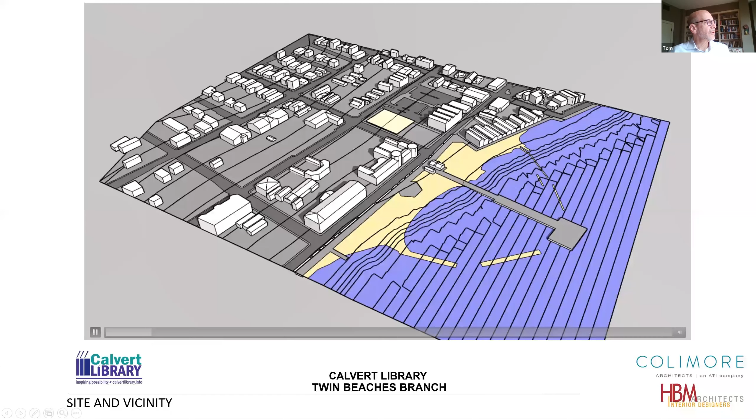Across, this is Bay Avenue here, this is Chesapeake Avenue here, 5th Street here. Our site and directly across the street, primarily residential, smaller residential buildings. We've got larger buildings to the east along Bay Avenue. This is a proposed building that's in design further along than we are, going to be a multi-use building.

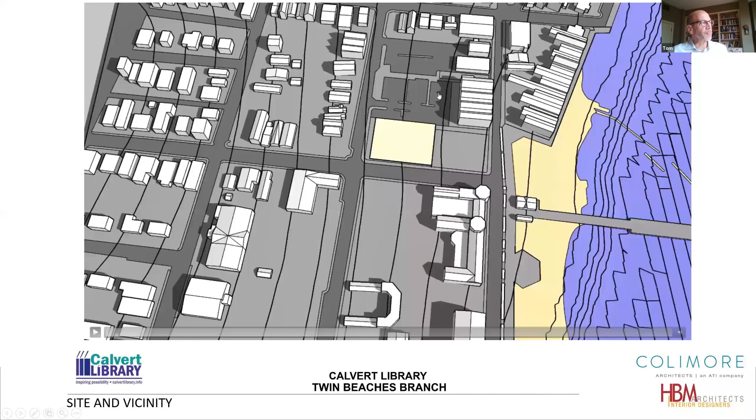You can see a lot of open space currently, parking lots around it. This is an open lot to the south of us as well. So it's a pretty prime location currently.

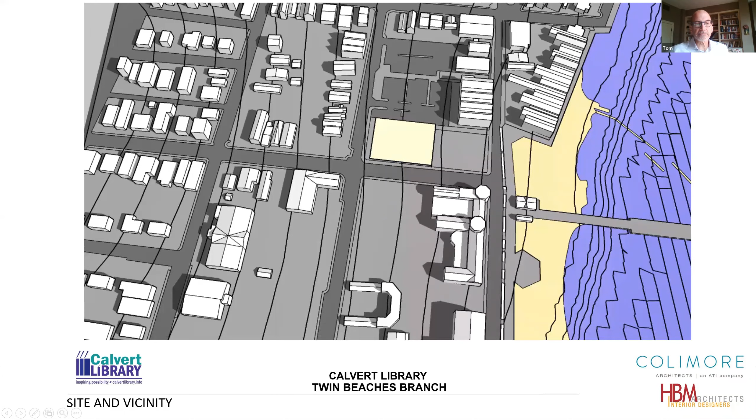This is our intersection and our site off in the distance here. You can see the significance of this major intersection of Chesapeake and 5th Street. Our goal is to design a building that will reinforce this intersection, hold this corner, and start to set up a building edge along this block.

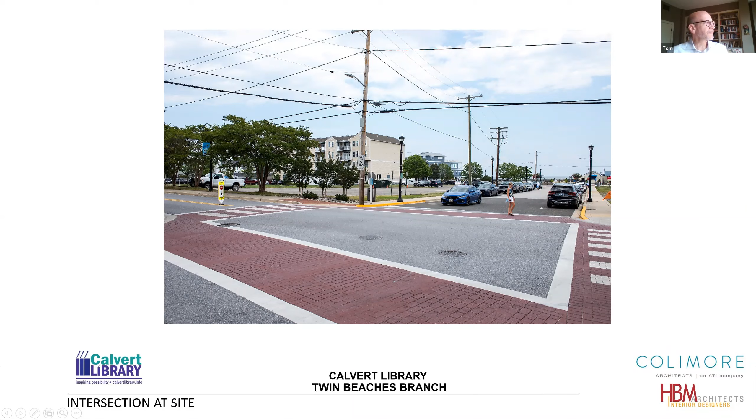Some of the surrounding buildings, taking a closer look at some of the buildings in the immediate vicinity. These are residential buildings, multi-family, so they're some of the larger buildings in the vicinity. Some of the common features you can see right away are the sloped roofs and the siding, the wood siding or wood-like siding material. Some of the newer buildings are elevated off of the floodplain.

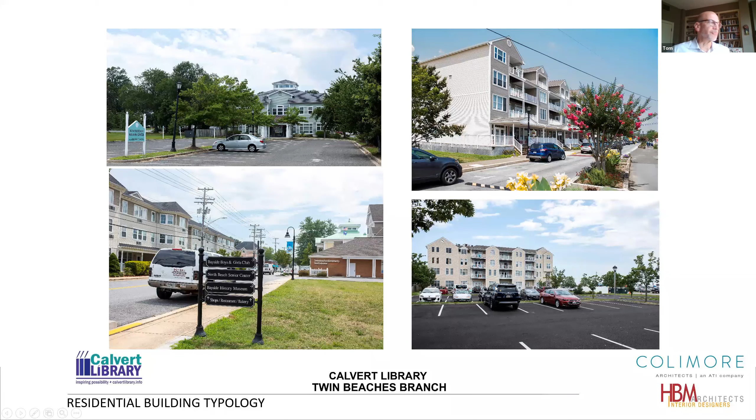Now these are our neighbors on the site. They are a different type of building, however. They're not a public building like we're addressing here. These are pretty private residences. The insides of these buildings are reflected on the exteriors that you're seeing here. So the inside are living spaces, and each room has its own little unique program and use, and that is typically a private function. Hence, you've got these buildings with a lot of solid wall with individual or small groups of individual windows. We call these punched openings because it looks like they're just taking a piece out of the solid wall to create those openings. This is something that lends itself well to this type of building, but like I said, it's a different type of building than we're dealing with.

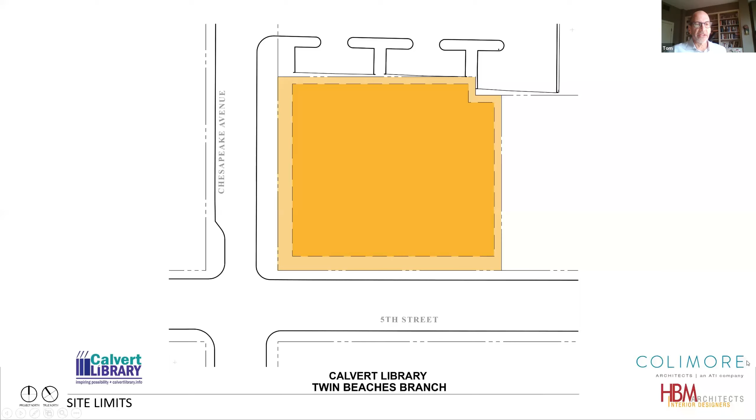So again, looking specifically at our site, here's our site at the corner of Chesapeake and 5th Street. Chesapeake is a major vehicle thoroughfare, as you know. 5th Street's pretty significant as well for vehicle traffic. A lot of people, when they come into town, I know when I came into town, I came in off of down 5th Street, this way to the beach. So our site is sitting here at this corner.

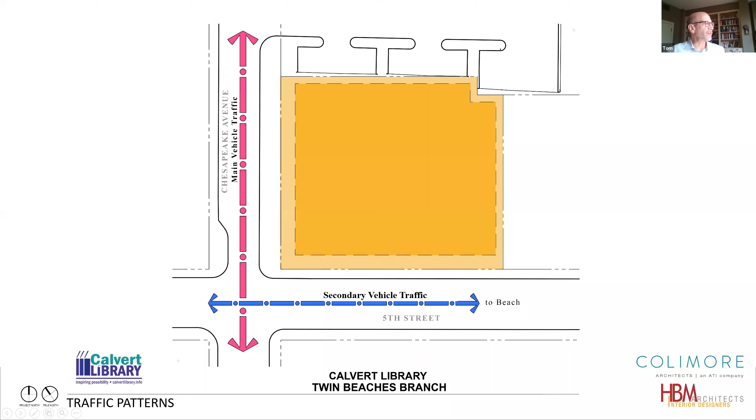So we feel we've got two very significant facades, two very significant faces of the building that we need to consider so that we can address these major thoroughfares. That's one of the things we're going to be trying to do with our design.

This red area here, I guess we're calling this the front of the building. So we're going to put the building entrance off of Chesapeake Avenue. This is still a very significant elevation as people come and go back and forth from the beach. This will be the entrance to our lower level of parking. I mentioned that some of the buildings are elevated for flood control reasons. Ours is elevated as well, but a little bit more so that we can actually utilize that space at ground level for parking.

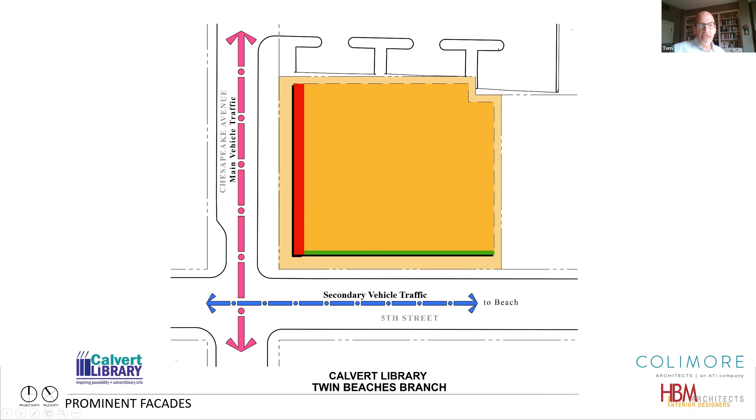And we showed you the corner. It's a very significant corner. We want to keep that in mind for our design and emphasize this area of the building, not just in architectural elements, but with activity. We want to try to activate this corner so that the action happening inside the building becomes visible on the exterior as pedestrians or vehicles pass by.

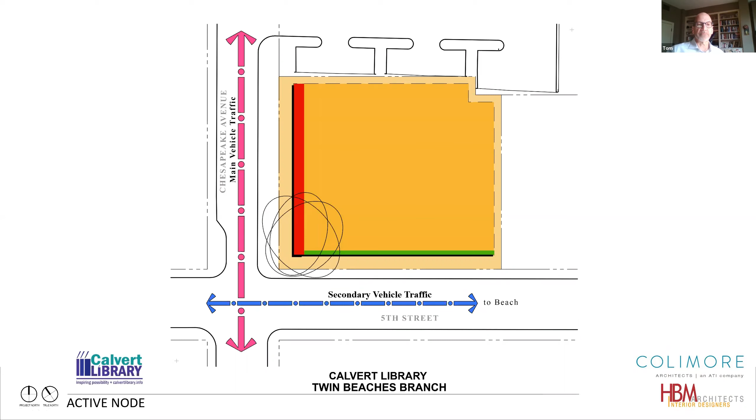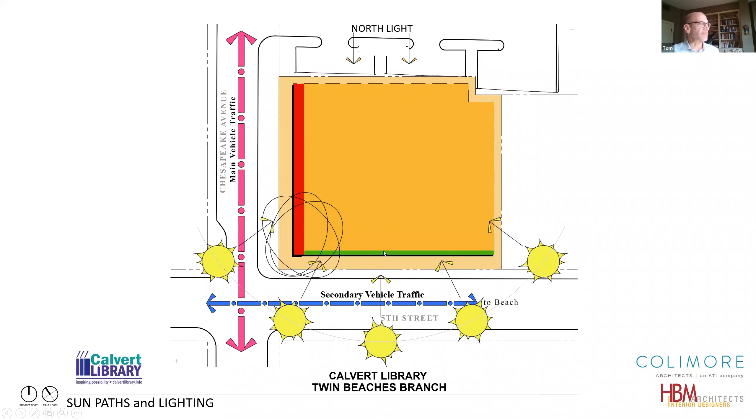We have north light coming in from this side. We want to consider how best to capture as much of that north light as possible. As you know, that's a very constant light throughout the day, very good for reading or really any other activity. It's a precious commodity, and we have a lot of it here on our site.

Finally, views. We have water views to the east and southeast. As you saw, we're one block away from the sands, so we're going to capitalize on this and try to take advantage of some good views in these directions.

I'm going to show you some images now that aren't necessarily your building or from our design. They're just images from other modern libraries throughout the country that we've drawn from for inspiration for the feel of certain spaces and their function.

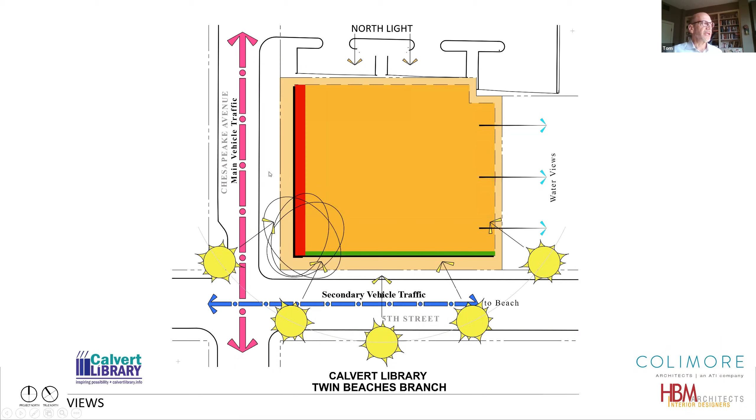So I mentioned that we want to activate these areas and express the interior functions as much as possible, displaying that on the exterior of the building. One way we're doing that is by having a small cafe, located at the entry level, the southwest corner, at the corner of 5th and Chesapeake. People sitting at the counter along the windows will have views out to the street and corner, and the activities inside will be visible through a large window in this area.

On the second floor, immediately above that, we have the children and teens area. The teens area wraps that southeast or southwest corner right above the cafe, so there'll be a lot of activity from that function visible from the street as well.

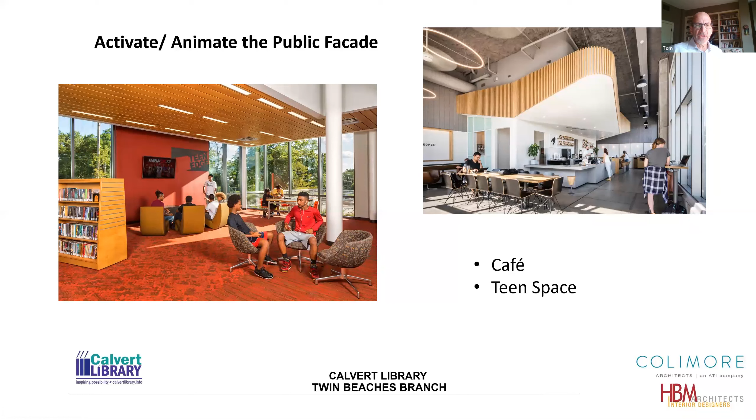I talked about the main entry being right off of Chesapeake Avenue. We are going to bring stairs that take people from the main entry level up to the second level, wrapping around an elevator, and pull that out in front of the building along Chesapeake Avenue in a sort of tower structure. We intend to open that up for visibility to the street as well, so driving up and down Chesapeake Avenue, you'll see people walking up and down these stairs.

You'll see the blank wall, which is the elevator, and that will give us an opportunity for possibly displaying artwork, temporary rotating collections, whatever, things you can experience as you're ascending and descending the stairs, and also things to give people a glimpse as they drive by on Chesapeake.

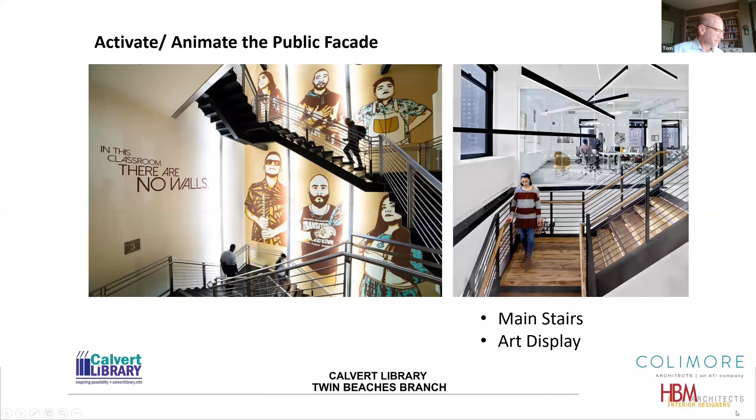We're going to maximize window space as much as we can. There was actually a comment during some of our early programming meetings with the public—people really liked the look of all the glass they were seeing in some of the examples presented during that session. So we want to take advantage of areas of glass as much as possible, not just so that from inside the building you get a view out into the outdoors, bringing those outdoors inside with you, but also for the views those will afford of the activities within the building, visible from outside.

So views inward and views outward, especially at night when the lights are on. We really want to activate that facade and give it a dynamic presence.

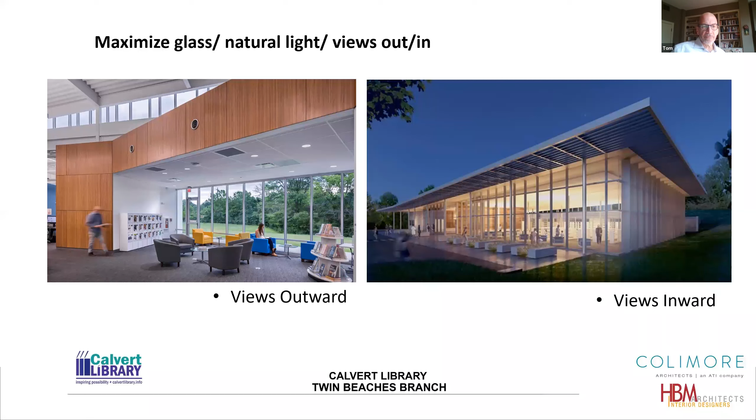We have opportunities for landscaping and use of outdoor space, not only along Chesapeake Avenue, the sidewalk that leads up to our entry stairs. We anticipate some planters worked into our stair system, which will double as benches and seating for people to hang out on those entry stairs.

Likewise, we're going to have some terraced decks off the east side in that area where I showed you we had those views to the water. These areas will be landscaped and hardscaped, possibly with large planters and seating areas. The walls of the building will open up in these areas and allow the interior space to flow out into the outdoor spaces.

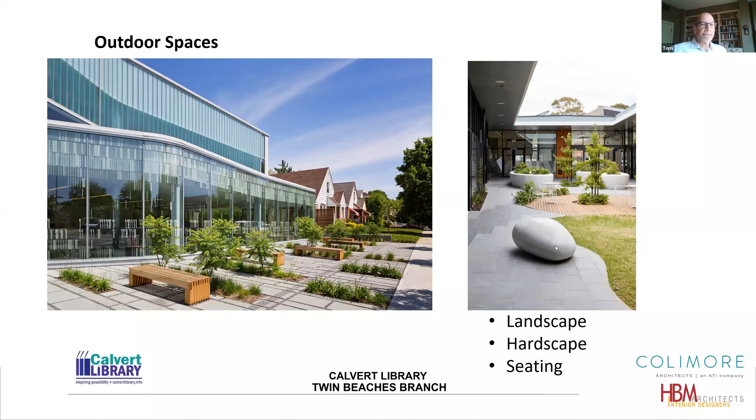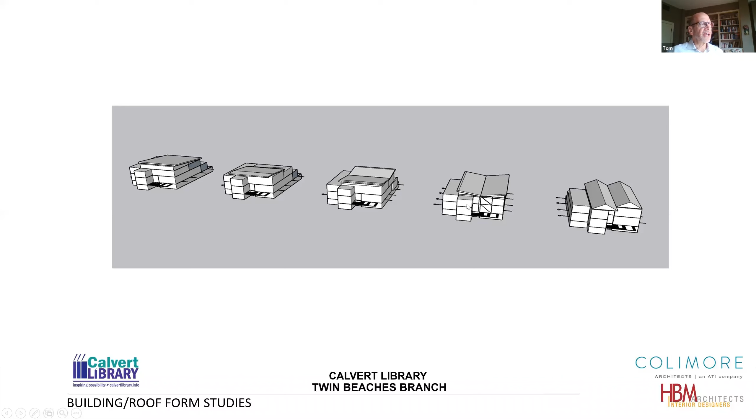We felt that this served our purpose better of defining the main volume of the library building. So this is the one that we ended up developing, that we ended up pursuing. This butterfly roof, as it's called, forms a valley in the center, which tends to highlight our entry slot, double high entry slot, and then it rises up to the south and to the north.

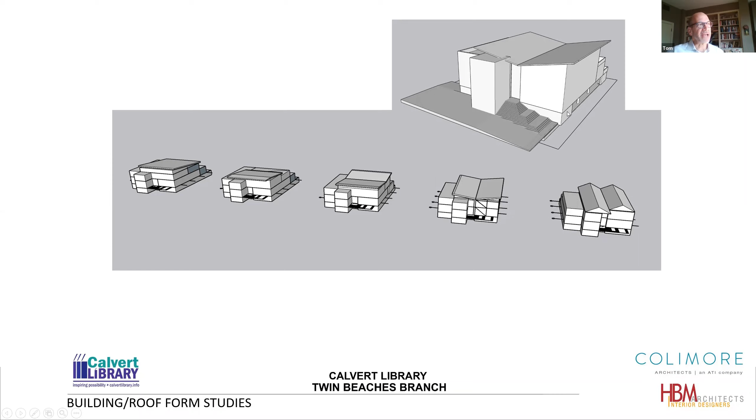That maximizes the amount of light that you're going to get in at this area, rises up over these lower roofs here to the north, gives us the opportunity for some clerestory windows to let in some of that north light that I was telling you about.

We've got a monumental stair. We have to get up about 8 feet off of the sidewalk here. So that stair opens up, and kind of helps engage this corner to again bring that activity out to street level and involve pedestrians and vehicles at this busy intersection.

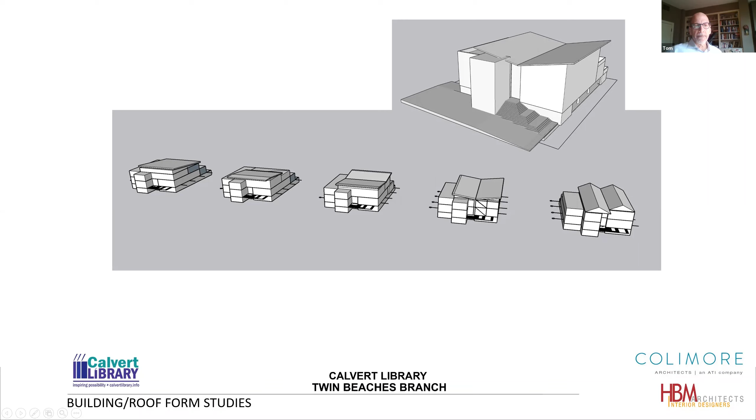Then we just had a little fun figuring out what these walls might look like. Here's a little sketch that shows what I was just talking about with the butterfly roof, which Carrie reminds me also conveys an image of an open book. So that's an appropriate metaphor that I hadn't considered. I think that's pretty appropriate.

You can see our double high entry space here. Where are we going to do our windows? How are we going to group them? What's going to be solid wall? What kind of fun can we have with different forms on the outside? Maybe this could be incorporated into our sun shading system, and we can have some creative forms displayed in that.

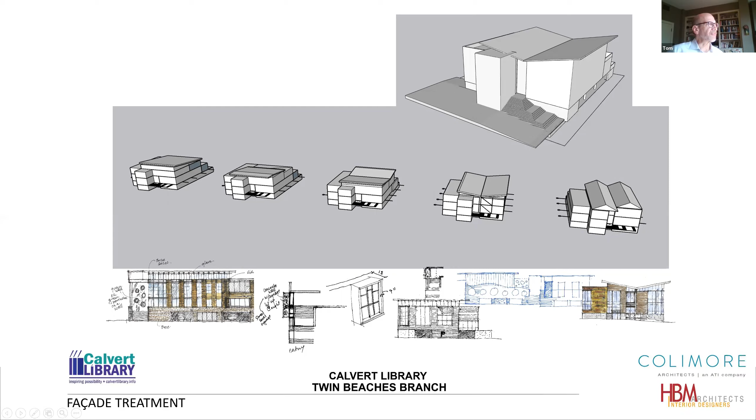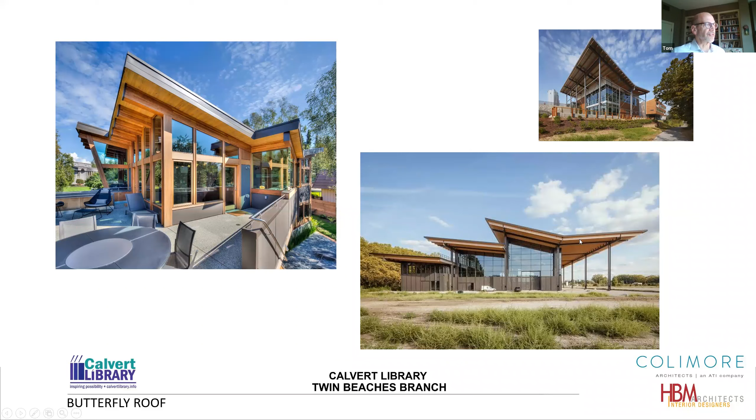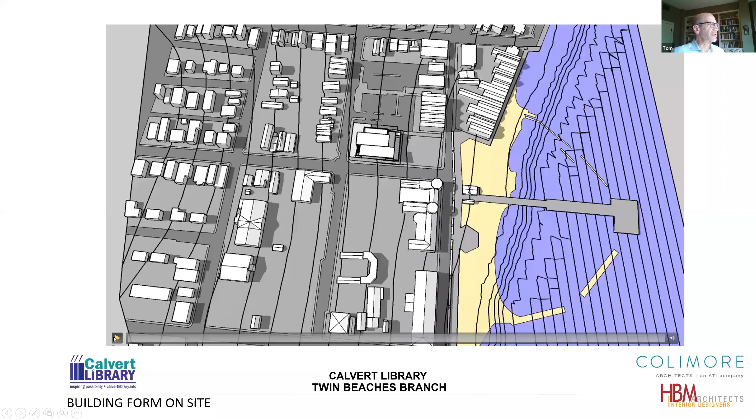So now that we've got the massing of the building, we've got the roof in place, let's take another look at the site. There's not going to be any materials represented on this model, just looking at the building forms and how that relates to some of the forms in the vicinity.

Here's a view coming down Chesapeake Avenue. You can see our corner. Stop it here - you can see our corner and how these stairs begin to reach out towards that corner. See the elevated section here - this will actually be the entry to our parking garage.

The roof reaching up, grabbing that north and south light. We've actually pulled the roof out and enclosed the top of our stair and elevator tower. A lot of glass here, making that stair and the activities on that stair visible to the street level.

We've taken some structural support for a large beam that supports the valley in our roof. We want to develop this as kind of a mast-like shape to kind of stress the nautical theme of this site.

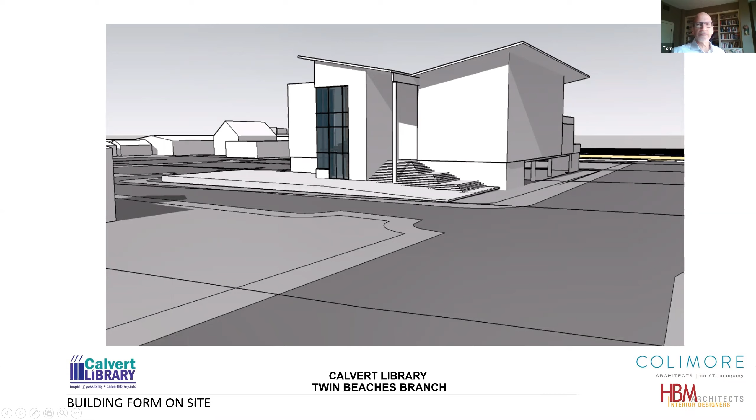We talked about the materials in the vicinity being mostly wood siding or wood-like siding. We'd like to take a cue from that, proposing our building be constructed with a similar type of siding material. We're not going to use real wood siding.

We want to avoid the maintenance, painting, and fading associated with real wood siding. There's a lot of new materials out there today, like phenolic material. It's a manufactured material that has the look of wood but won't fade, doesn't need to be sealed or painted, and is virtually indestructible. The way it attaches to the wall gives a nice reveal that expresses the wood siding look you see throughout the town.

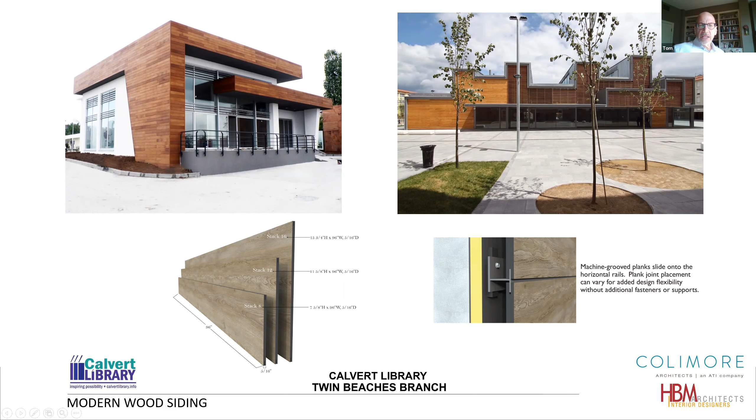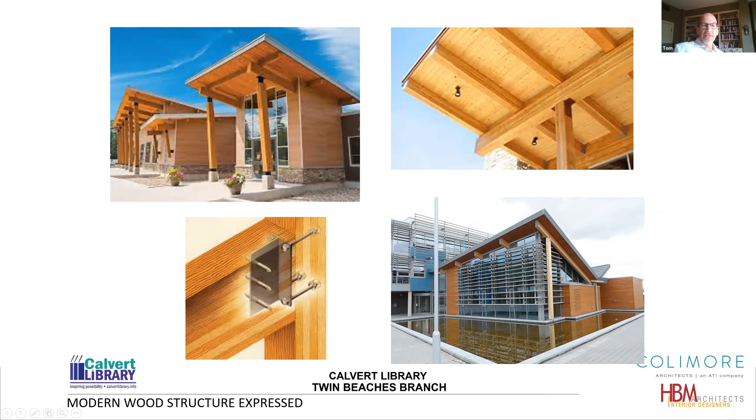It looks like heavy timber, and that's the look we want to convey, but it's actually a modern engineered wood material—much more ecologically friendly, more affordable, but still very nice looking. We intend to leave that exposed so that as you come into the building, you can see the structure holding up the roof. The exposed wood will really warm up the space.

So with exposed wood inside the building, you can see the wood decking, which we hope to expose on the roof—this is the look of tongue and groove decking in between the roof beams. In this example, not only is that exposed and expressed inside the building, but these features penetrate the building wall and are expressed on the outside as well.

We want to emulate that feature. You can see the wood rafters, the wood beams, as well as wood on the exposed soffit outdoors, which adds to that transparent feel that we're after here.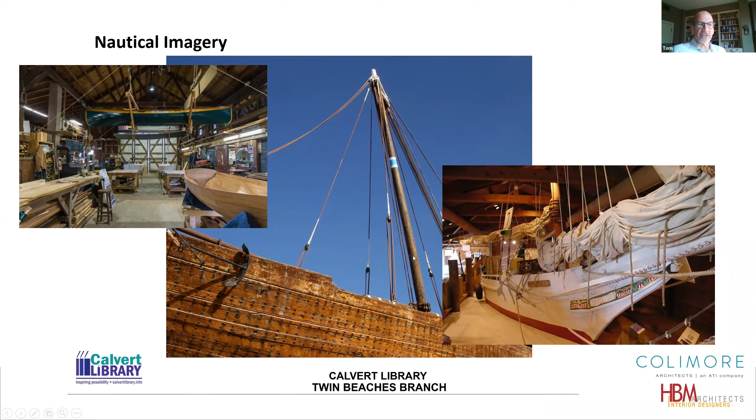Now, I mentioned the concrete construction of the parking garage area—that's primarily for durability and withstanding storm surge and flooding.

The walls will be poured in place concrete, and the supporting columns inside will be cast in place concrete, round concrete columns. We're proposing not to cover that. We like construction materials to stand on their own, and we think there's a specific beauty in that. We can take the concrete and ensure it has a nice finish, expressed rather than covered with paint, stucco, brick, or stone. We think it can stand on its own and form a base for our building above.

Here you can see a pretty successful combination of a similar wood-type material we want to use with exposed concrete walls below. Likewise here, they've done a good job working together to get a nice finish on the concrete, and it blends well with the wood features shown here.

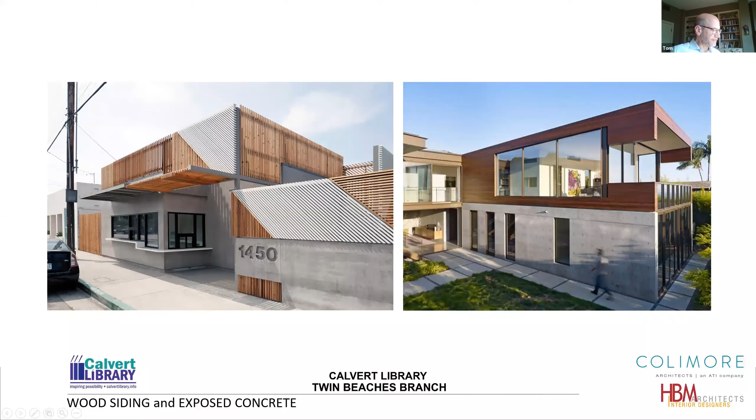Finally, with the design features, we talked about the sunshades on the south wall. If we have glass on that wall, we want to protect the interior from the day-long bombardment of sun. So we're proposing similar types of sun shading, as you see here, with systems of horizontal slats.

Here they're creating a certain pattern, a certain rhythm by varying the spaces between the slats. We want to pick up on that and do something similar—looking at a combination of slats in various orientations to give a graphic sense to the sunscreen on the wall, kind of like what they did here. They had a little fun with it, articulating it a bit to add visual interest to a functional feature on the south side.

So now we've got the form, and now we've got some idea of what the materials are. Let's take another look at the site and see how things are shaping up with the actual look of the building on the site.

Wood siding, large open windows at the west facing facade. This would be the cafe area. This is the view that people would have of the activities going on in the cafe.

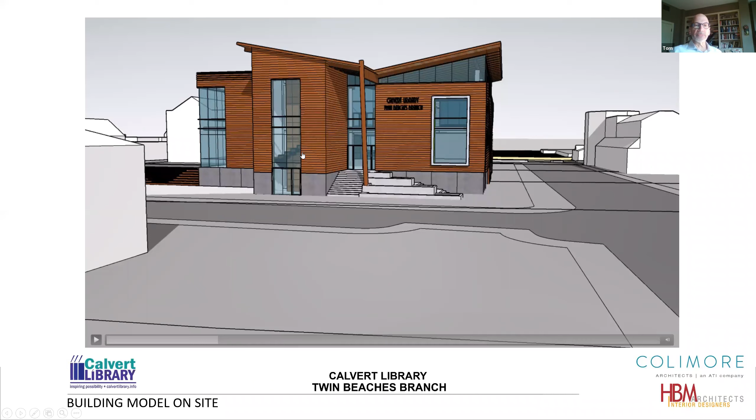This is the north side of the building, so we wanted to wrap the glass around that corner, so we've got a transparent corner here.

These are rooms that are set off from the main volume of the building. This is a large meeting room that can be divided down the middle for two smaller meeting rooms.

Up above, we have the maker space and additional employee office space. We'll get into a look of the actual building plan here in a second.

We're anticipating this is going to be the service side of the building. So we've taken the same type of sunscreen that we'll show you here in a minute on the south side. We're going to incorporate a similar type of construction for an extension of the building facade to shield that service area from view from the street.

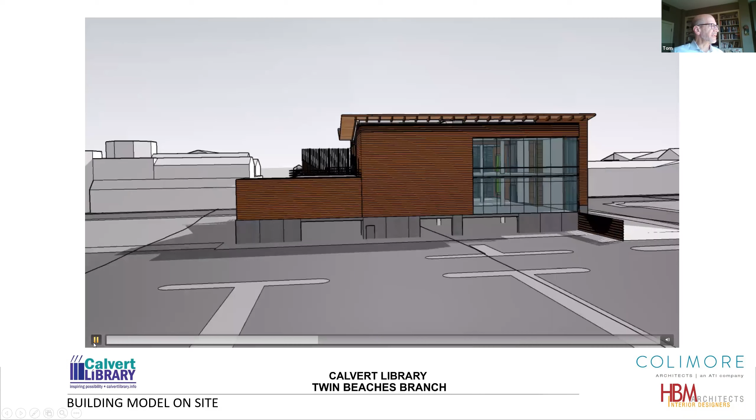Keep spinning around here. You see our parking lot next door. Here are the decks that extend out from the main volume of the building towards the east.

So you're going to have the nice ocean views from this side, both from the main deck level and from the children's and teen area. This is a large overhead door that opens up and really brings the outdoors in for an extension of the interior space.

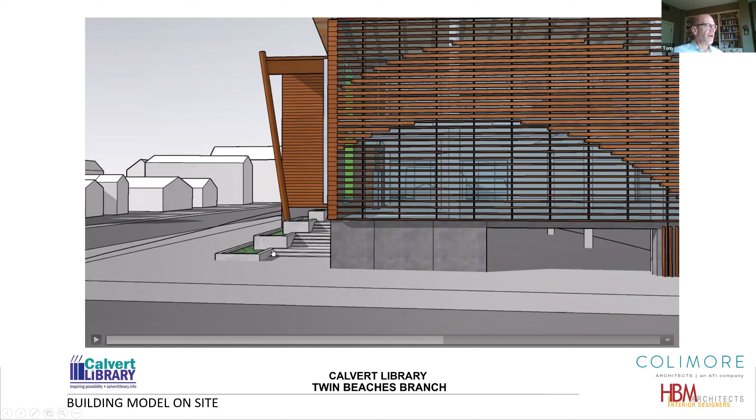Here's a view of our entry stairs. You can see how they open out to invite you from the corner in towards the entrance of the building. And our sunshade, which we've developed to express this ocean wave on the side.

This will efficiently shield the interior spaces from glare of the sun, as well as throwing some very interesting sun patterns onto the floor, especially at night when with lights on inside this building. This thing is going to really be a beacon on the street.

Heading a little further down. So Tom, you just talked about being a beacon at night, and there are definitely some concerns about light pollution at night. So can you talk about reconciling being a beacon with also not bringing too much light pollution?

The light will not be directed skyward. Any of the fixtures that we have outdoors will be dark sky sensitive, light pollution sensitive. We think the overhang from this roof form will eliminate a lot of the glare.

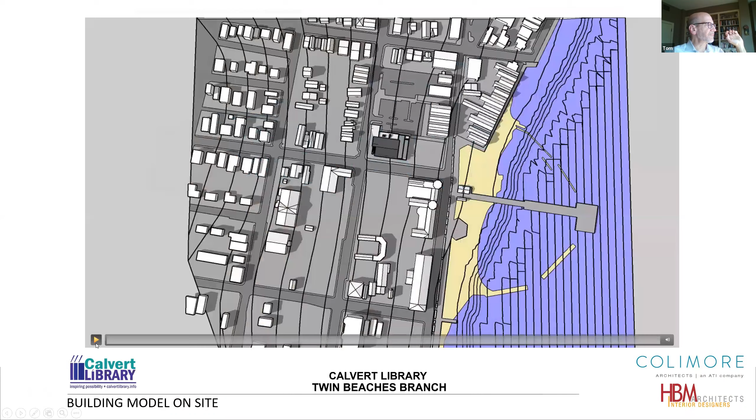And we're not talking about harsh lighting, just typical room lighting. So I don't believe that light pollution will be a major concern.

These will be interior lights. It'll be more of a glow of the glass facade through this screen, and you'll get the two-story view here of the lights beyond the facade. Nothing inside the building shining directly outward.

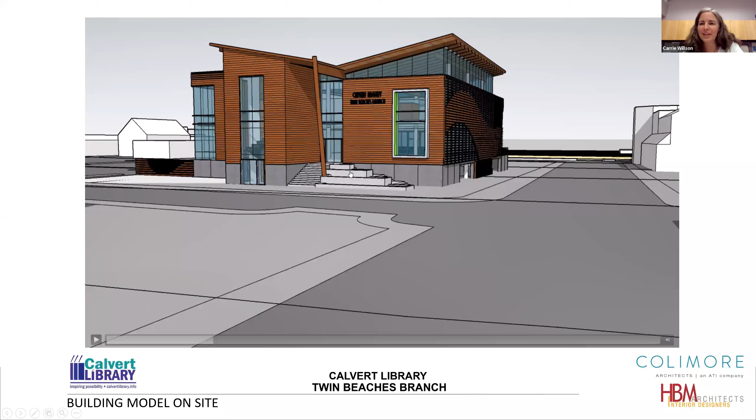Thank you. Does that answer your concern at all, Carrie? I think so. I was just pulling things out of the chat, but okay. Yeah, well, that is something that we will be considering.

Let's spin around here again, and then head out. Front entry. Entry to the parking garages are seen here. Continuing down 5th Street and out to the water.

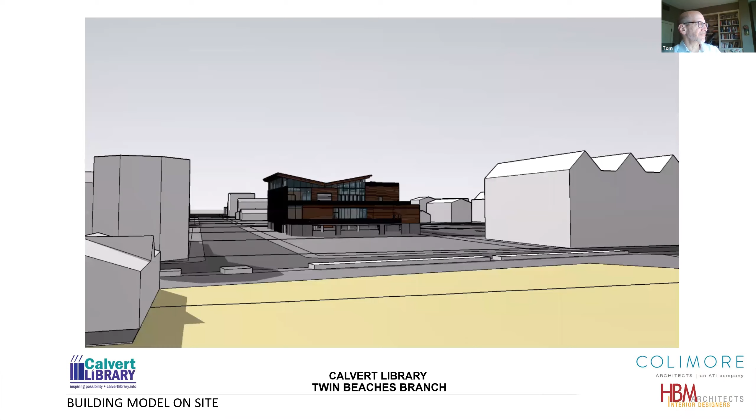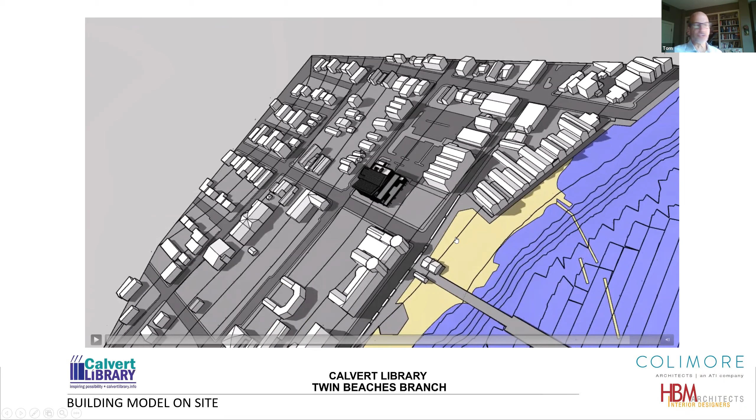So now that we know what the exterior image of the building is, I'm not going to dwell on the floor plan. That's really a topic for a more detailed later discussion. But since I have you here, let me just go over the floor plans just so that you have a sense of where things are within the building.

We've been working with HBM architects who are library specialists headquartered in Cleveland. They came here and they've done, I think, a really good job of working with Carrie and others to get the program organized, work out the flow, and make it work within the site.

An optimal setting, I believe.

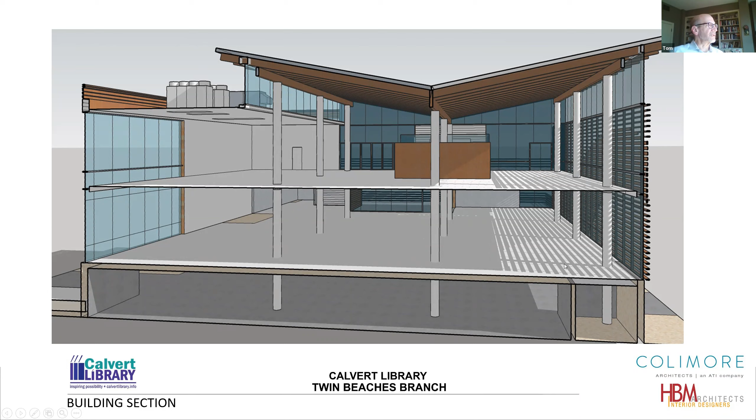So this is where the design stands currently. This is the image that we're hoping to convey.

I was talking earlier about an experience I had when I first began this project. I was talking about it with a friend of mine who happens to be an educator, really into libraries. He knows a lot about some of the local libraries in our area, and he was familiar with new modern libraries that had just been erected in Anne Arundel County, Howard County, around here, but hadn't had a chance to check them out yet. He just saw them as he was driving by, saw the building, saw the form, and it was inviting enough that he said, man, I've really got to find some time to check that out, see what that building is all about.

Laura, since Tom's done talking, I'll answer your question out loud. There are meeting spaces for small 1 to 4 people groups. On the 1st floor of the library, there are 2 study rooms that would be exactly what you're talking about. And then there are some spaces for 1 person.

Sure, you want to go to the 1st floor? I'm having an issue with all my windows here. Let's see if I can.

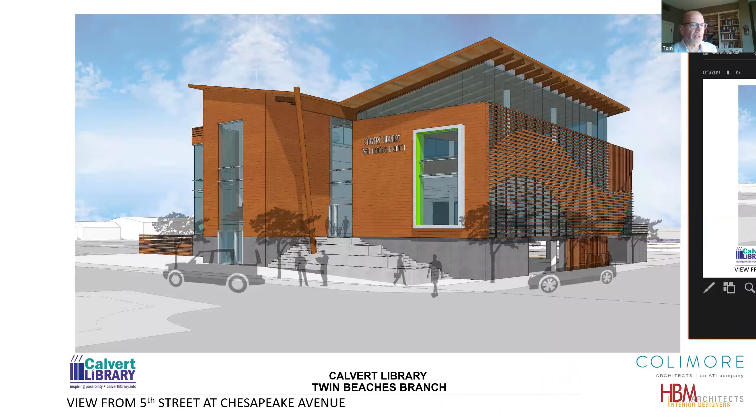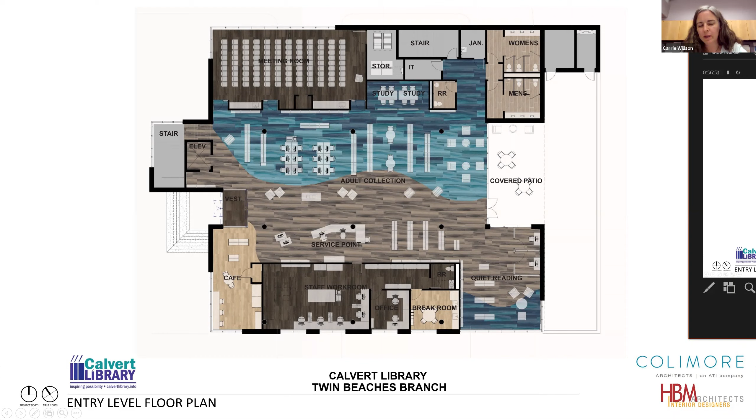And then there's tutoring space on the 2nd floor. There are 2. They might not show in this one, because this was an earlier version. I used this one because it was all colored up and pretty. Yeah, I love this, the carpet that's going in is so dynamic. I believe that those 2 rectangular things outside of the makerspace are where the tutoring's designed for. Oh, these guys, I think. No, those are display units. Anyway, there's some tutoring up there.

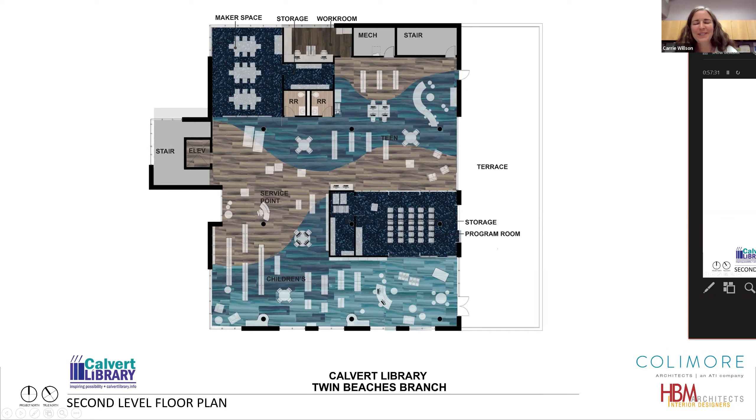Tom, Gwen asked if you showed the outdoor deck spaces. She stepped away for a minute, and I was focusing on chat a lot. I think he talked about the outdoor terraces. I talked about them, I did not dwell on them when we were looking at the model here. We're gonna, there you go.

But yeah, there are two terrace spaces. Here's the terraces. We've got a terrace. There's a good view. So we've got a terrace off the main level. This is a large glass wall that you'll see through as you walk in the main entrance. This portion is actually a covered terrace, all weather terrace, and then open terrace beyond.

Up on the second floor, children's area and teen area. This is the central program room. This gate will open up and open everything up to their deck on this level. And like I said, this won't all be accessible. That's a lot of space for a deck. So we're gonna design it with just specific hardscaped areas, planting areas, leave some space for actual green roof trays for stormwater management purposes.

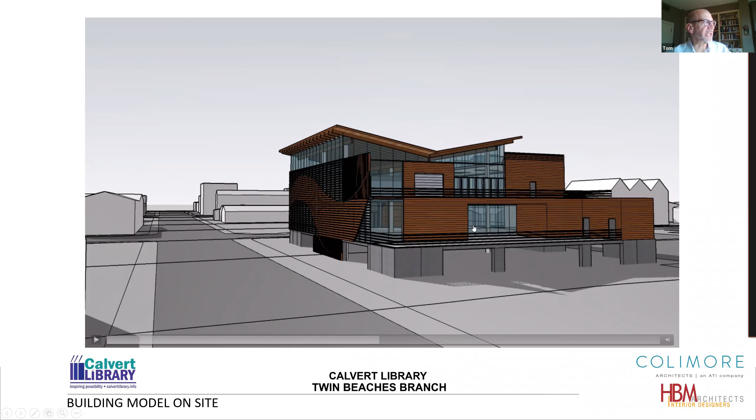Anything else? Any other comments? Can you also talk about solar panels for a moment? Solar panels, yeah, that came up in a couple of earlier meetings actually. And this roof, I think, lends itself well to the use of solar panels. You can see if we laid them along this plane, they would be in a good attitude for collecting solar energy. We're looking at it. It's all a matter of cost, budget, and recovery, when does it start to pay off. So we will do that analysis. We'll present it to Carrie and the county, and they'll make a decision as to whether we incorporate solar into the design.

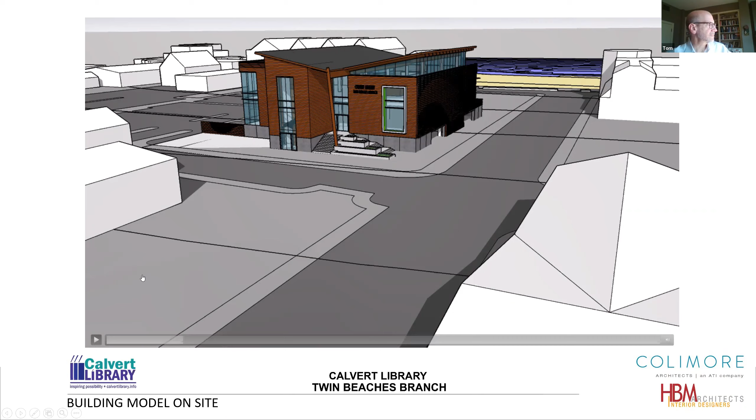Maria's asking if the terrace is child safe. It'll be as child safe as it can be, but every space is safer with adults. By code, you only need a 42-inch high railing, but we're going well above that—probably 5 feet along the terraces in the children's area. We'll also work to keep them back from the railing with landscaping and hardscaping. Yes, it's definitely a concern.

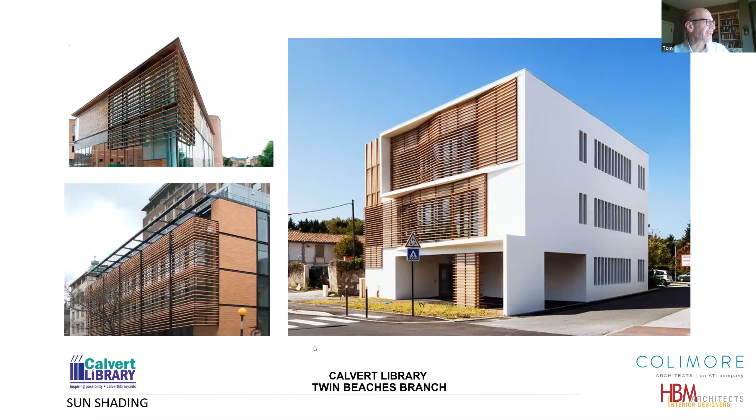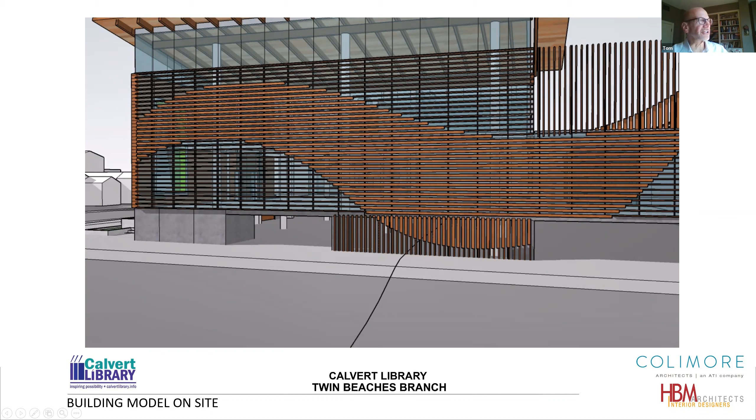We are going for a low liability facility. That's why we took the sunscreens—you'll see we rotated portions of them 90 degrees, because CJ pointed out we were creating a ladder effect. We don't want people climbing up here, so they've switched to a vertical orientation, likewise up where they're accessible from the deck. That's why we have that shift in orientation in the screening. It still works to maintain the waveform, I think.

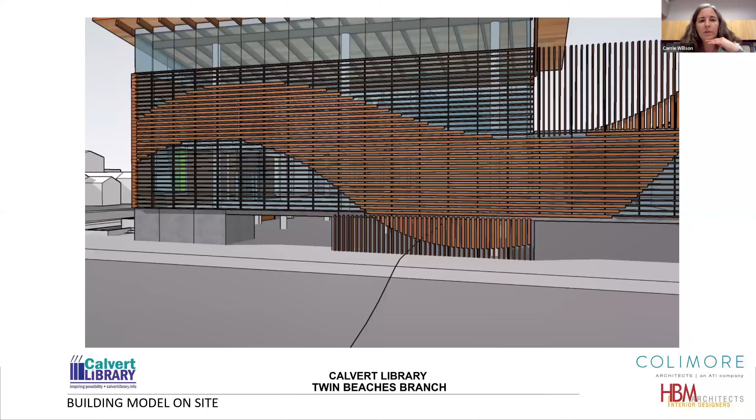I don't know if anyone on the call, Gwen, wants to talk about parking in North Beach. I don't know if there are firm plans for the town, because as Laura points out, we are building in one of the existing parking lots for town. While there's currently lots of good street parking, we also rely on the gravel lot across the street, which has plans to become the Russo's multi-use facility that Tom mentioned earlier. So there are parking issues, and there will be, with some plans not yet firmed up with the town for additional parking. There are currently 33 spots under that first level of parking, 2 dedicated handicap spots on the street, and a third on Chesapeake Avenue that's a drive-up, drop-off spot rather than dedicated ADA.

For those not reading chat, Gwen did respond that the town is addressing parking—they've recently added spots via a town-wide assessment and striping, and they're looking at other options too. That's certainly on all our minds. One aspect that didn't come up this time but came up in the last meeting was the idea of book drops.

Here's a good view of the entry off the sidewalk at grade into the elevator lobby—this will be after-hours access. Inside, there'll be a bank of after-hours lockers with a keypad and a book drop. Also on this corner, there'll be an after-hours book drop as well, leading to an automatic conveyor that takes items up to the library offices, located right here.

Another issue discussed was access from the parking garage underneath the building to the main library level. We did not extend the elevator down to the garage parking level, primarily for flood reasons—it can be done, but it's expensive and a maintenance nightmare. So what we have is a door and a few steps that take you from the parking level up to our elevator lobby, and from there you can take the elevator up to the main floor.

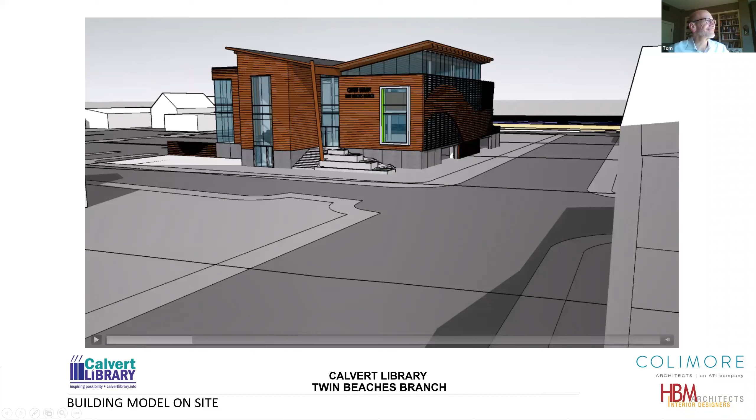Oh, there's a question, Tom. Mickey's asking about the concrete of the parking area - is that a place that lattice work could be applied, or possibly some type of non-invasive, non-damaging vine or greenery? Could be an interesting place to have some green.

I don't know if Tom's still there. He's had a long day. Well, I'll write that down and we'll talk about it, Mickey. That hit me earlier, where it could be something we could put there, or something later too, like if we don't like the concrete or how it's aging.

And that would break up the cars, and who knows, if you direct the gutters to it, it may be able to eat up some of the rainwater depending on how you plant it. Given that it's a fairly small parcel and mostly building, we're trying to fit as much green as we can around the building to make it feel like it's more in a park than on a corner. You got to be careful with what you plant so it doesn't damage anything - English ivy is great, but it destroys finishes.

Anything else? I'll shoot you an email. I had a few random things, but I like how it turned out. It's got great possibilities. Of course, we're still at it, but I'm pleased with where we are.